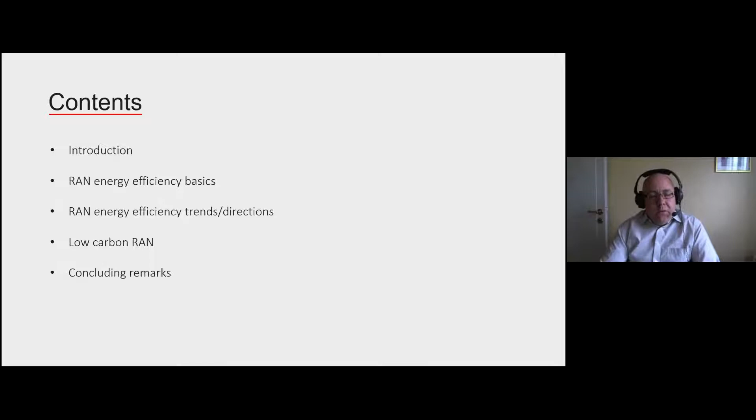Then I have a block that goes into the RAN energy efficiency trends and directions right now. I also then have a block that is a fairly new area I would like to introduce here that I call low carbon RAN. And finally, concluding remarks, or rather a summary of the talk.

And many of these solutions are, of course, also good from a sustainability perspective. You might have heard about something called the enablement effect, which is about how these ICT solutions can contribute to save energy or emissions in other sectors. Over the years, there have been a lot of studies around this. One of the recent ones is from 2020, when the GSMA published a report, the enablement effect, where they looked into some of these technologies, for example, smart buildings, using smart meters and building management to improve the energy efficiency and also affect people's behavior to save energy in buildings.

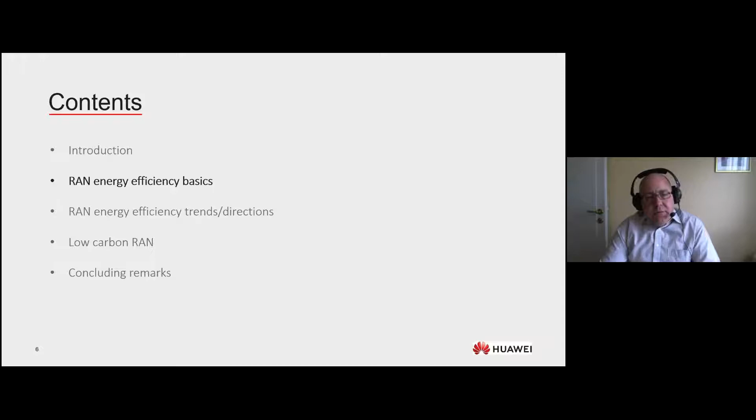And then you have rectifiers converting to DC. You might have some power backup in terms of batteries and so on. You have air conditioning, lights, etc. And this we then call the site infrastructure. And typically when we talk about site energy efficiency, this is what is meant, and that is actually the DC power you supply to the base station divided by the AC power that you get into the site, so to say. So it's more or less the inverse of the PUE, the power usage effectiveness that you might have heard about in data centers and so on.

Then we have the base station, where you have the baseband, the radio units, and so on, that produce output power in the air. And sometimes you hear about base station energy efficiency, and that is typically the sum of these output powers divided by the input power to the base station.

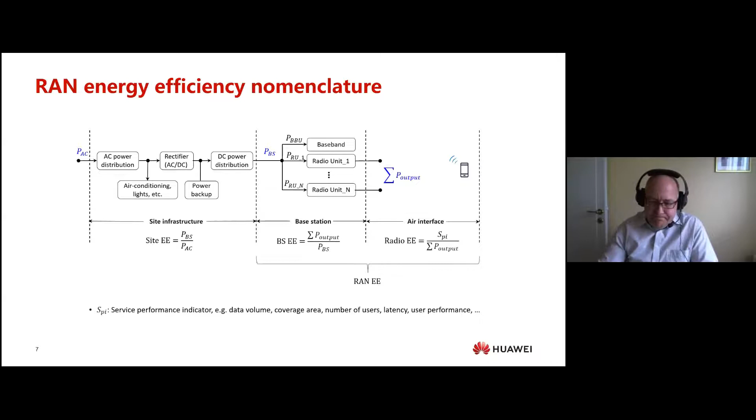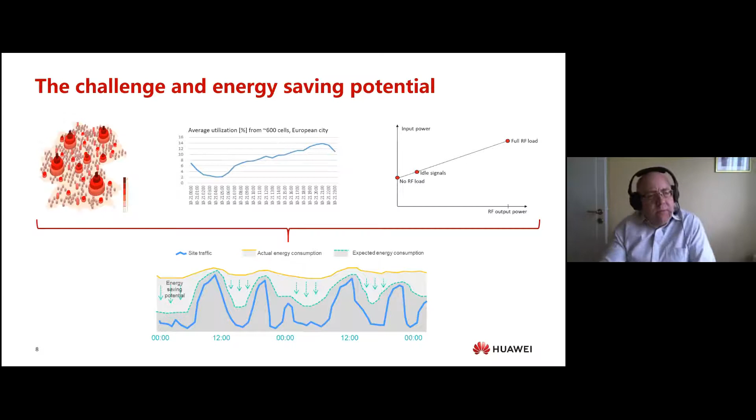And why is that? Well, there are some reasons for this. First thing is, a wireless network is an access network. That means that energy is not only consumed when you deliver data. A lot of energy is also spent on providing coverage, so that you actually have the network built out there and you are able to access it when you need. So there are two purposes why you have the network there.

And that means that many base stations are actually out there without load or with very little load. Looking at the network level, the load is actually fairly low. You see an example there in the middle. It's from a European city, 600 cells. Average utilization goes from around 2% up to 14%, which of course means there are cells there that are highly loaded. But when you look at the whole network average, maybe around 10%.

And then we have the typical behavior of this type of equipment, which I try to illustrate to the right. There is actually a rather large static power consumption, say around 40-50% of the full load power consumption. And considering we are moving around this 10% load, you're moving just along a short line of that, which means that you actually end up with this yellow curve. But of course, there might be ways so that you can approach the green curve more.

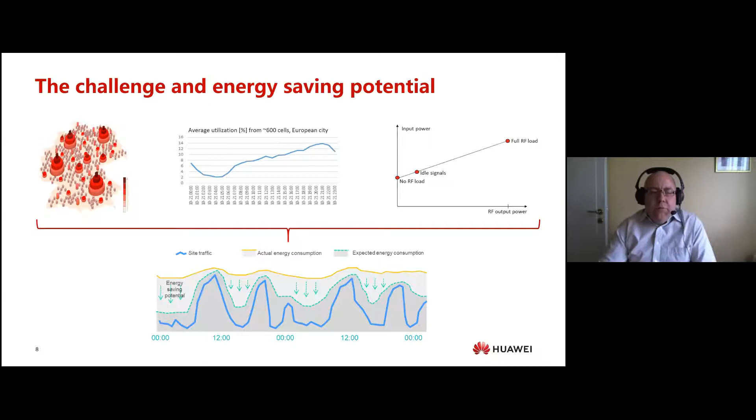And that is what I will come into on the next slide: how to harvest the energy saving potential that we saw there. First thing is, of course, what I call resource on demand scaling. As you know, in a wireless network, you have a lot of radio resources that you offer to carry traffic. Naturally, you would like to only provide as many resources as are needed, but you also saw the traffic variations. You actually need to have quite a lot of resources out there, but then you should be able to scale these down when they are not needed.

That's the first thing, but that's not enough, because if you scale down these resources and the power consumption doesn't also scale with the resources, then of course there's no meaning with that. So you would like to have this sort of variation, and you would like to push it down towards the green curve. And that is continuously being worked on and improved. Quite a lot has happened during the years I have been here, but we are also working quite a lot with what I have called shutdown capabilities here.

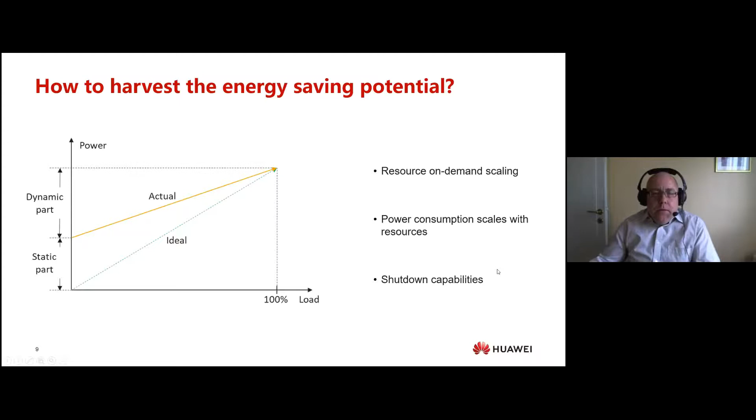And that is when you're down here, you are able to deactivate components of the base station, which in another way brings you down towards this ideal curve. That is actually a very important way of saving energy. So what does that mean when I say shutdown capabilities? Well, it's about connecting this to the radio resources you use.

So you have a base station that is idle, but it still needs to transmit some mandatory signals, the reference signals here that come every fourth or every third symbol. But in between, you can actually do a sort of micro sleep, which means that you deactivate parts of your power amplifier. And that is actually very useful in saving energy on a network level.

Next thing is the space domain. From LTE onwards, we have MIMO in our systems. With 5G, we also have massive MIMO, which means that you have a lot of RF channels and a lot of antenna elements, which probably are not always needed. So the idea here is that you shut down RF channels when the conditions allow.

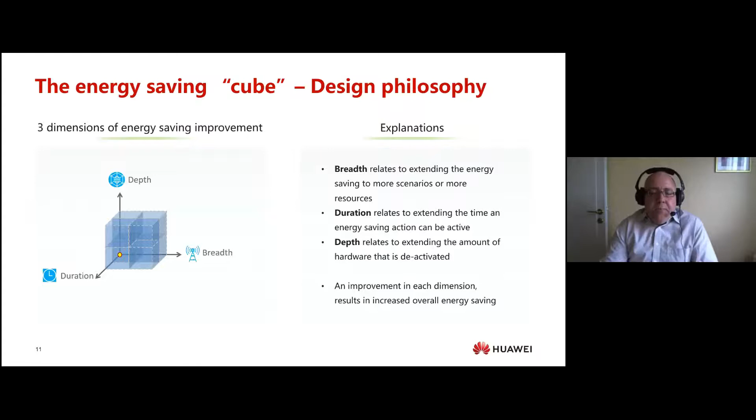Duration relates to extending the time an energy saving action can be active. Depth relates to extending the amount of hardware that is deactivated. And then of course there are connections between them. For example, if you increase the duration, then it's quite intuitive to see that you can also deactivate more components. You can have a deeper depth in your sleep, so to say. But an improvement in each dimension results in increased overall energy saving.

And I have two examples here. Actually, they are on how to increase the shutdown duration. First here is what I call power saving scheduling. So consider a situation to the left there where data to users are scheduled in every TTI. That means that no time domain shutdown is possible. Well, there might be some symbol in there that you might shut down, but no larger chunk of time to shut down.

If the scheduler instead would allocate the data as in the right figure, pack the data in time domain, then you would all of a sudden be able to do shutdown in TTIs 1, 2, and 3. So just by doing that, you free up quite a lot of resources where you can do shutdown. This may, of course, affect the delay and latency, so you need to keep track of your data so that you don't affect the performance in the network. But that is one simple example of how you can increase the shutdown duration.

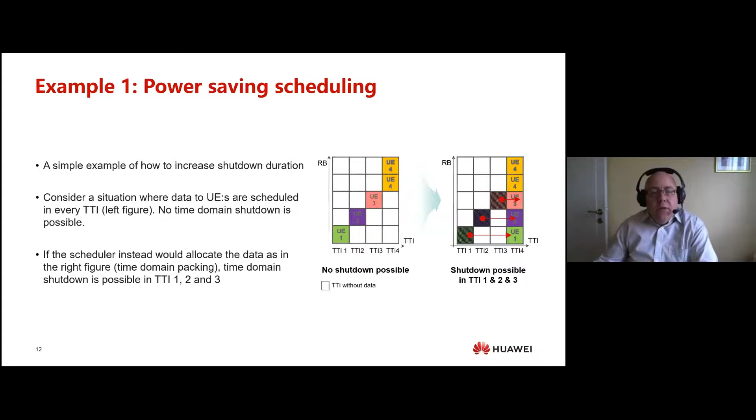Another one that is quite well known is the protocol design of 5G NR when that was made 5-6 years ago now. Starting point was 4G LTE, where we have a 10 millisecond frame. If we have an idle 4G LTE air interface, then you actually have a common reference signal transmitted every 0.2 milliseconds. They are so often there that I haven't drawn them in this figure. So they are all over this, and you just have very short few symbols where you can sleep, but not more. And you have the synchronization signals twice per frame, the red ones, and the broadcast channel once per frame, the green ones up there.

Then in 5G, there is also a 10 millisecond frame. One important thing, there are no common reference signals there anymore. All reference signals are dedicated, so they are not there until there is a user there.

Synchronization signals and broadcast channel are transmitted more, so to say, block-wise in different patterns, so-called SSB sets. And these sets are fitted within a half frame, as illustrated there, which then is 5 milliseconds. But the periodicity of these sets can be configured to everything from 5 up to even 160 milliseconds. The default is 20 milliseconds, which I use in the simple calculation here below.

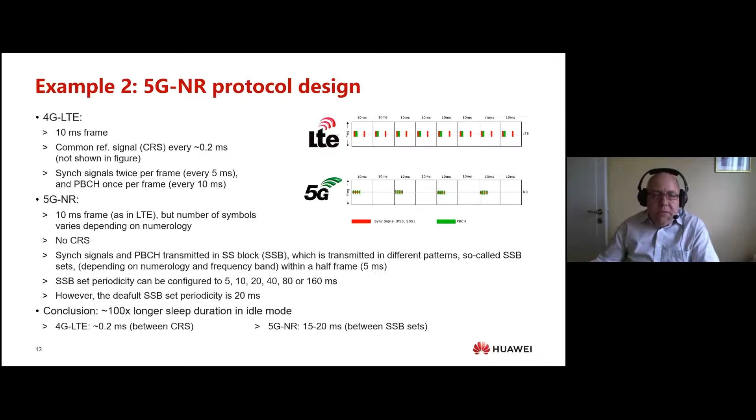So what we then see is that in 4G LTE, you had this sleep duration of 0.2 millisecond between the common reference signals, while in 5G NR it's actually 15 to 20 milliseconds between the SSB sets that you have here. So it's actually 100 times longer sleep duration that this protocol design enabled. So that is something that actually improved the energy saving possibilities compared to LTE by 5G.

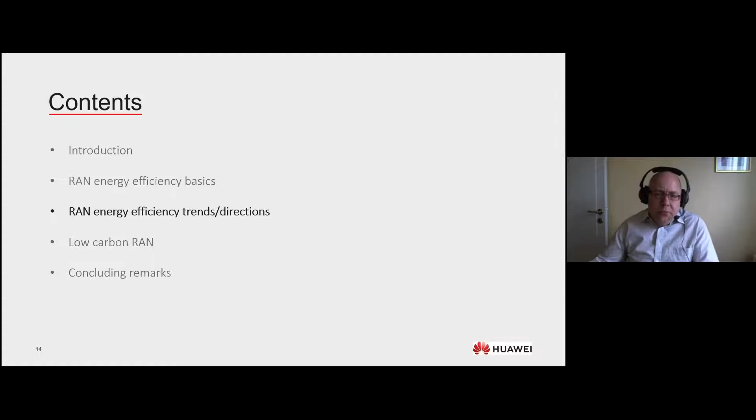So that was a bit about typical basic ways of saving energy in wireless networks. Now I will move on a bit, going into the trends and directions that are much worked on today. First thing is what I call here multi-antenna RF or transmission efficiency.

And this goes back to in recent years, more or less with 5G we have seen, but also with the other technologies, that the total transmit power of base stations has increased. And this is because we have wider bandwidths, more carriers, more antennas, and so on. And this naturally needs more power, but it also contradicts the energy saving objectives, because more powerful hardware typically consumes more energy. In line with that, there is what I would say a new energy saving track now, and that is about improving the energy transmission efficiency.

In this example, by having an ultra large antenna array, you see it here, so many antenna elements. So the idea is simple, have that as a way of getting more antenna gain. So you can maintain the coverage or maintain the output power by getting less power from the power amplifier, so to say, and utilizing the antenna instead to amplify this up. And we have seen some tests that actually are able to save about 30% power by utilizing such designs in Massive MIMO.

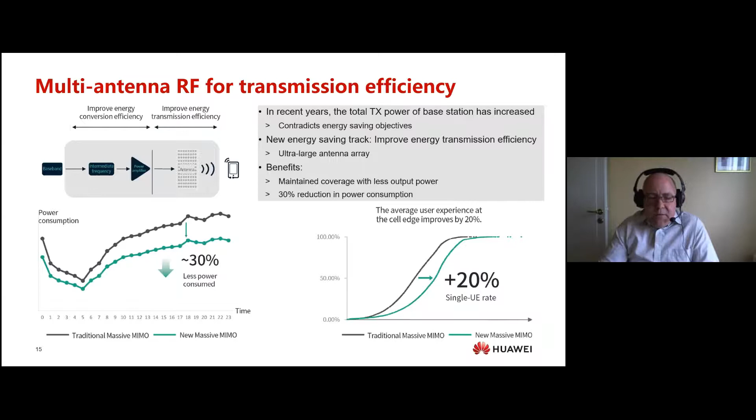Now I come into the site area that I mentioned before when I introduced the nomenclature, and one trend is also simplifying sites. This has been there for a while, but I think it has come even more recently. Traditional DRAN sites with air conditioned equipment rooms are not so energy efficient, only around 60% site energy efficiency there.

One trend that has been there for some years now is the CRAN deployment, where you centralize your baseband. So you have one site where you have like a baseband hotel instead, and then you have only remote radio sites. And these remote sites can then be simplified and typically free air cooled. So it's only in the central location you need air conditioning. And this can actually improve the overall site energy efficiency quite a lot.

These solutions are also now coming more and more for the single sites, so to say. Instead of having equipment rooms, you have one cabinet where you put everything. And you can also have something more simplified than that. You just have a pole deployment. You might have heard about blade sites and so on, which also improve the site energy efficiency significantly. Over 90% efficiency is typically possible now in these solutions.

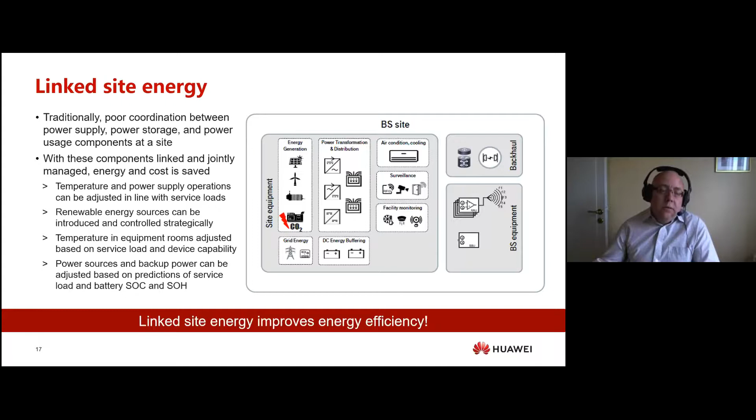We have co-coverage detection, where you actually run AI on a whole bunch of measurement reports, so you can identify the candidate cells for energy saving measures. You can actually do this both intra-site and also inter-site. So you can then easily know which sites and bands actually have the same coverage.

So then you know that if I want to shut down these cells or these carriers, then I can do this, because I know this one I keep has the same coverage, so I can do handover of the users there, which then increases the use of this and increases the energy saving.

Traffic forecasting, of course, in quite a detailed way using spatial temporal data. You can even use weather forecasts, forecasts on how cars and humans flow, traffic and so on, to service characteristics. So by taking all these into the AI machinery here, you can get a quite good spatial temporal prediction of the traffic, which then also helps you optimize how you let cells sleep and when you need to wake them up and so on.

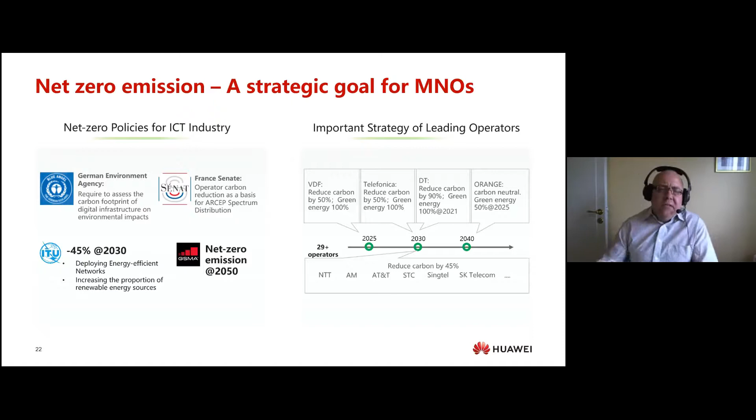The tool you typically use when you want to assess your carbon footprint is life cycle assessment. I'm not an expert on this, but I know there are experts both in KTH and also RISE and other organizations here that probably know this better than me.

But what you do is that you actually look at the whole life cycle of a product, from the raw material selection and acquisition to production, transportation of the product from the factories to the place where they are deployed, then of course the use, and finally end of life treatment when you take them out of service and you try to recycle and so on. As I said, many studies have been done on this.

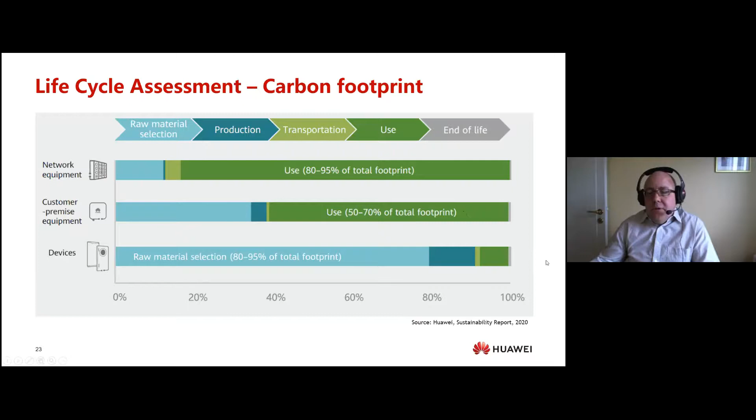Yes, that can also be good, because that means, I shouldn't say easily, but one way to reduce the emissions is of course to use green energy. Then you can affect quite a lot of this footprint. But still, embodied emissions is a very important focus area for the mobile network operators and also the vendors, of course. And there is quite a lot of work being invested in this, all the way from the material acquisition and selection, to use as much as possible environmentally friendly, renewable, recycled, biomaterial, and so on.

In the design, you want to make it as lightweight as possible, always looking for new architectures and so on. You optimize the packaging and transporting in order to keep the weight and the dimensions as small as possible. In the operation, of course, the energy saving actions are important, and also you can try to use as much green energy as possible, but it's also about how you can try to prolong the service life when it comes to the embodied emissions. Modular design, easy to repair, design for durability, and so on. And finally, in the recycling stage, it should be easy to disassemble so that you simplify the recycling and reuse of the materials that you have used there.

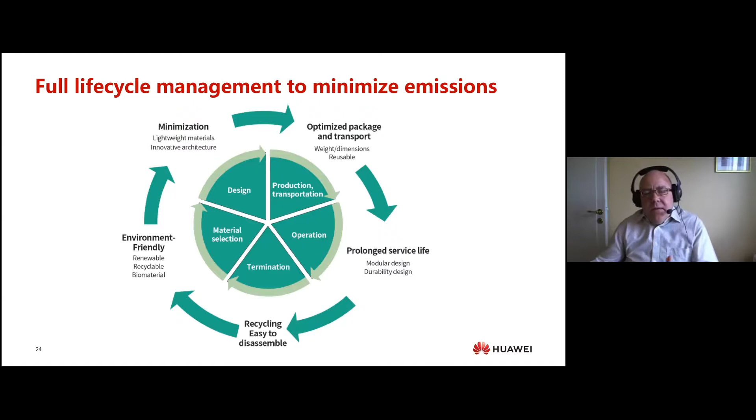That is very important work that is ongoing, but one can also ask, I'm not an expert on this, I'm rather a communication system researcher and designer. So I also ask myself, what can be done in that area in order to reduce the embodied emissions? Of course, we work with the energy saving and the use phase emissions, but there can be things we can do also in the embodied emissions. And one thing is, of course, the deployment and architecture, network deployment, and actually these site constructions may add embodied emissions.

But there are probably a lot of things that could be looked into here, alternative network deployments and architectures from this low carbon perspective. And I mean, now we talk about cell-free architecture, intelligent reflecting surfaces. What impact may they have on this, for example? Probably they are promising here, but it should probably be studied more.

We have these antennas where, I mean, it's just a tape stripe, for example. That could probably be an interesting thing when it comes to reduced embodied energy and so on. So many things to look into.

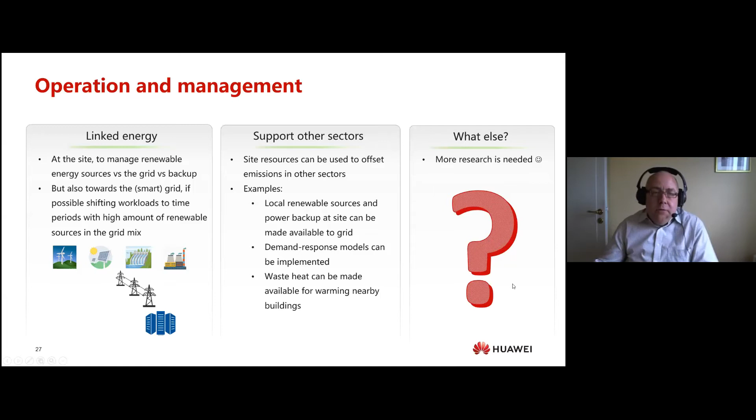By that, I'm coming to the concluding remarks, or as I just called it, a summary of the speech. So what have I been talking about today? First, I touched a bit on ICT for sustainability, where we saw that mobile technologies at least have the potential to contribute quite a lot to society in emission reductions. But it's still very important to focus on the energy efficiency of ICT, in particular wireless networks themselves. The coverage, the traffic variations, and dimensioning for the peak is a challenge here.

Traditionally, we worked a lot with resource scaling and shutdown capabilities for implementing energy saving, and this is continuously being improved and expanded to more scenarios. Some trends right now when it comes to RAN energy efficiency: the improved transmission efficiency I mentioned, site simplification and this linked energy, and then of course also AI and machine learning for network intelligence.

And low carbon RAN, which I just talked about, the new area of how our deployments, architectures, and also operational and management solutions can be designed in order to have as low embodied energy as possible, as a complement to the full life cycle low carbon design that is always being worked on.